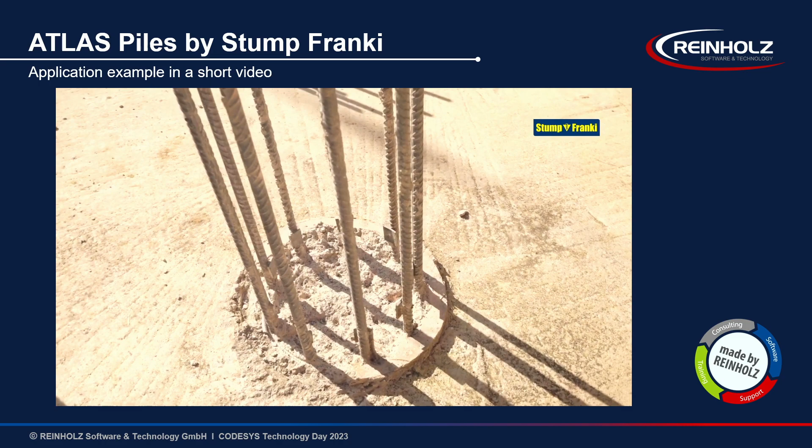That was to give you an idea. What did we see? The various steps to produce a pile. The cutting head is oscillated into the floor at the ground with some controllers regulating the pressure and the speed in order to drill the pile.

Once the drilling depth has been reached, the reinforcement cage is inserted. This has load-bearing reasons. Then concrete is poured in with reinforcement, and by hydrostatic overpressure in the pile, it is safe from groundwater break-in, so there is no groundwater leaking.

And then it starts getting complicated. It is unscrewed, and the concrete forms a pile, and you have this bulge that needs to be strong enough to allow for the load-bearing forces. If it's too long, it will break off. If it's too short, it cannot cater to the load-bearing capacity.

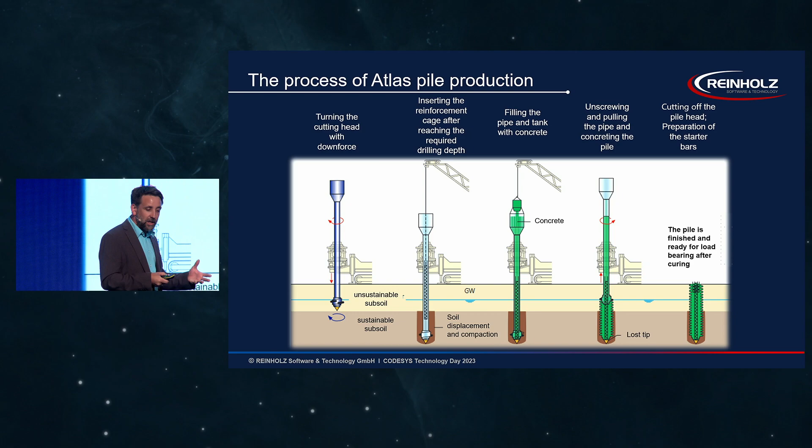This is a typical example of special civil engineering. Although it is so rough at first sight, it is rather filigree.

Well, what was automated with that machine and these machines used? All this is based on automation by CODESYS. So first, HMI, the human-machine interface.

Then you have an online connection to the server so that the real-time data can be exchanged immediately, so that you have logging and invoicing data during production, and then also you can evaluate everything.

Then there is a direct access to the machine, not with the automation server but with VPN, and with a VPN link with which we access the machine and help and support the customer whenever there are problems.

There are cascade controllers so that the optimal shape or contour of the pile can be combined with the optimal speed. You have automatic leveling functions so as to make sure that the pile is aligned with the ground as required by the customer.

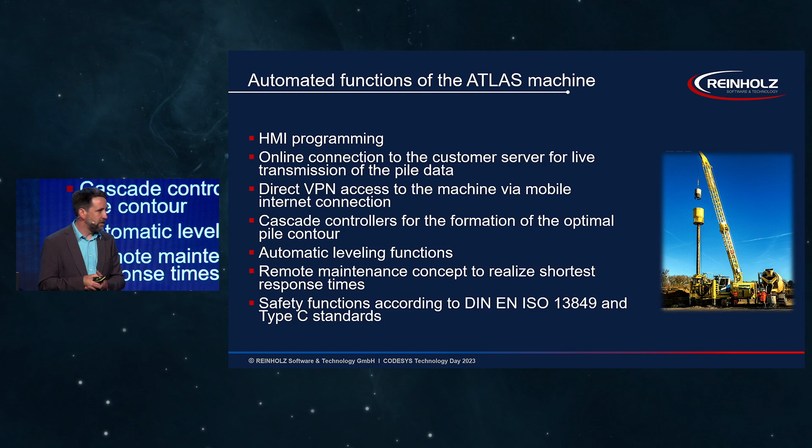Safety functions were already mentioned. You have a lot of application steps that are safety critical, where we have a lot of C standards, and all this is also in CODESYS. If we have safety features that are not covered in standards, we use our own libraries. They have automatic test case generators, and we have that automated.

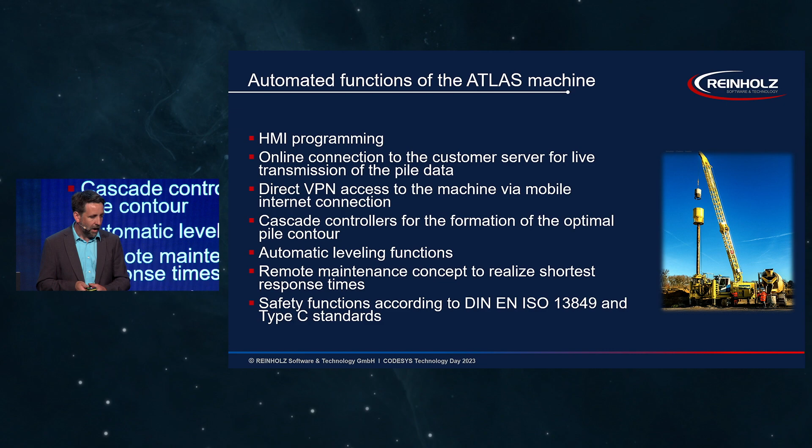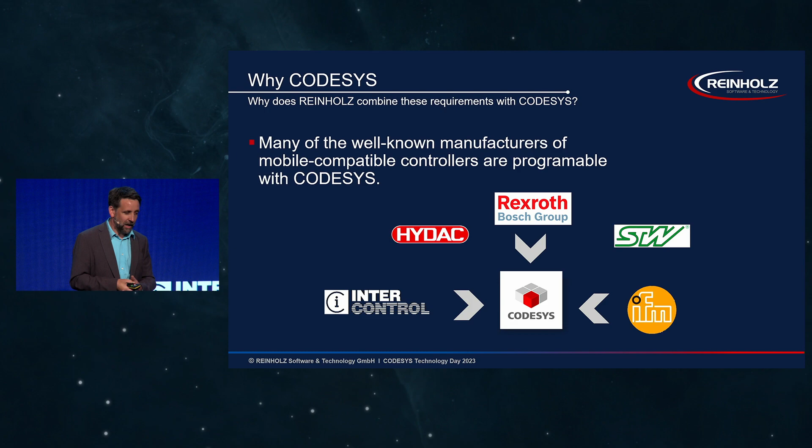What are other requirements that make CODESYS so interesting? There is this integrated safety, it is the SIL 2 version of CODESYS that we use. It is also easy to integrate web interfaces so that the foreman can see what is happening on site.

We have good compatibility with different manufacturer components, so if a component cannot be supplied or there is a better third-party component, you can combine it easily with CODESYS. That's where CODESYS excels. We have high flexibility in software development, we can integrate C parts in the code fragment, and you have object-oriented programming.

That's what we've been using a lot, especially if we develop standard libraries for customers. They are object-oriented and modular.

There is good remote manageability that works seamlessly. You can also access the controller with mobile connections, which is always the case with this special civil engineering equipment. And you have the benefit that there is full CANopen integration, so we have access to a bus system which has established itself in this vehicle segment.